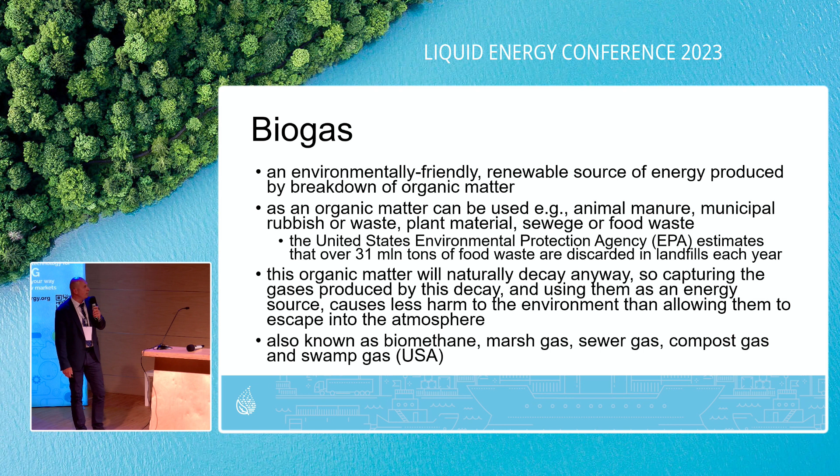The biogas can be used also in the circular economy, for example in the landfills, in the agriculture. All organic matter produced on the farm can be used as biomass. The biomass decays, and we can produce methane, which can be used to power machinery or to heat buildings. But yesterday we also heard that this is not the most efficient way of using it. The best is to make it pure, because as we see on the next slides, the composition of biogas, the raw gas, is quite low in methane, so we can remove all impurities and then make almost pure methane.

Simply put, to produce biogas we have to have the source of organic matter. We deliver it to a closed compartment, without oxygen, with some kind of microorganisms to speed up the process, and we can decompose this biomass. All the gases gathered above the surface then go to the tank, and we can use it as fuel. The rest of the biomass can be used in other ways, like for example fertilizer, as we heard about yesterday.

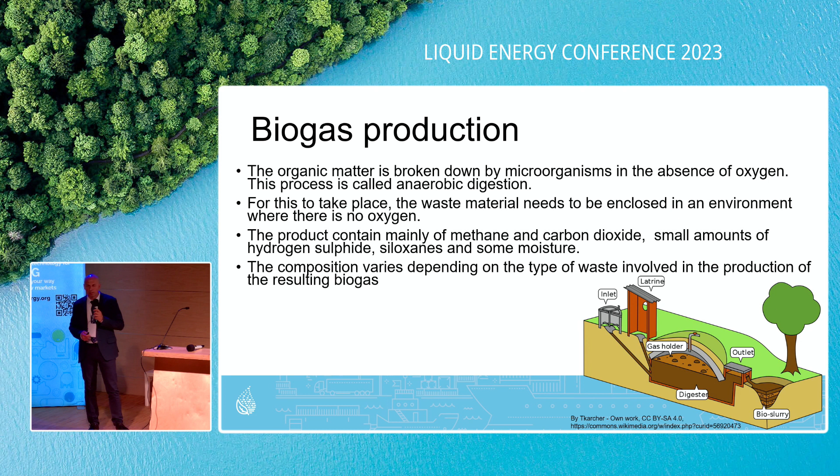Biogas and biomass are both biofuels and both renewable sources of energy, but for biogas, biomass is the raw material, and biogas is the end product. There are a few European Union directives which describe biogas as a renewable source of energy, so both biomass and biogas are environmentally friendly sources of energy.

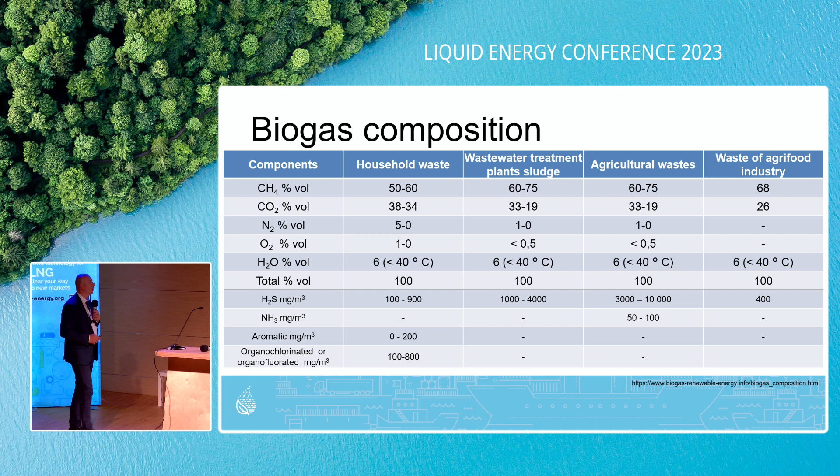We heard also that there are different kinds of waste which can be used for producing biogas. We can see that about 60% of the production, the gases when we decompose this biomass, is methane. Then about 30% is CO2, then nitrogen, some amount of oxygen, and also quite a lot of H2O, so water, and some other residuals in very small amounts. That's why using it locally as biogas to power machinery and heat houses is not so economic, because the heat power is quite lean, since it's only 60% methane in this biogas.

So what is the difference between biogas and natural gas? Because actually they are the same element, I mean the methane, the same compound. The difference is the time: the production method. Natural gas is produced over time, with pressure and temperature also decomposing organic matter to make methane and heavier hydrocarbons. Biogas, as we said, is the gas gathered and captured above the biomass which is decomposed. The second difference is the quantity.

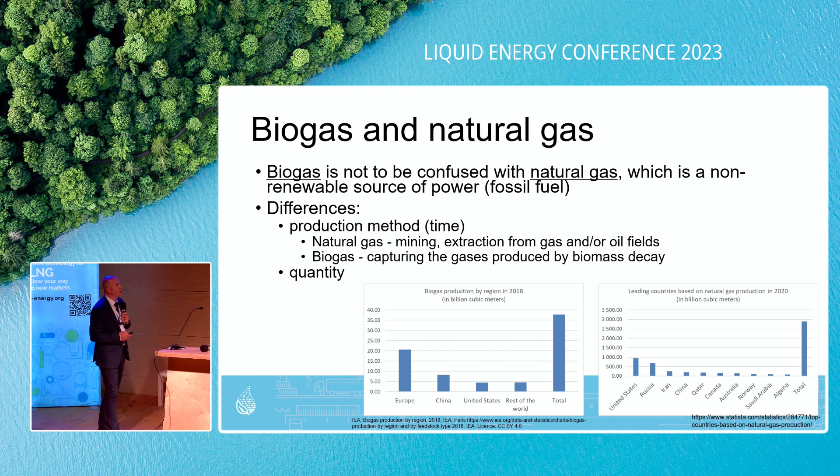Because it's a quite small amount of the biogas, we can blend it with natural gas to make it more friendly. For example, some EU directive describes the target that by 2020, 10% of energy in transport and 20% of energy for producing energy should be used with this renewable source of energy.

This is another advantage for biogas, because with natural gas, actually with liquid natural gas, we have a phenomenon called aging. Aging happens because the first compound which vaporizes is methane, and the composition changes as the heavier hydrocarbons are left behind, so the parameters of the gas in the tank change. In case of biogas, we don't have the heavier hydrocarbons, so when we remove all of these impurities, we have almost pure methane.

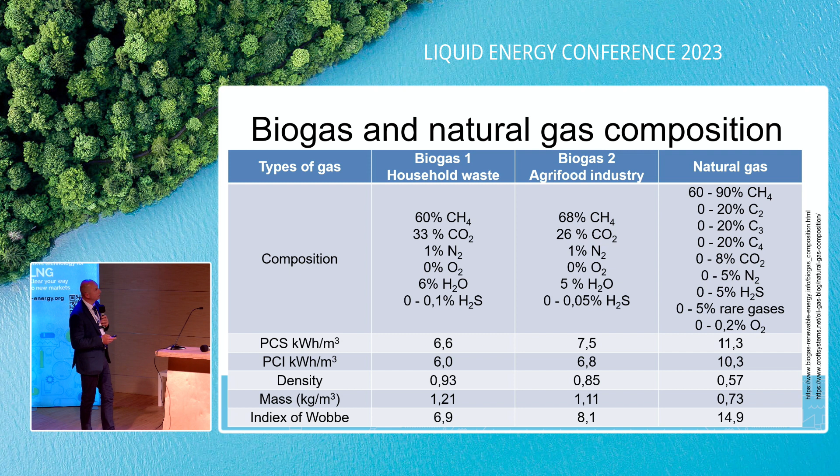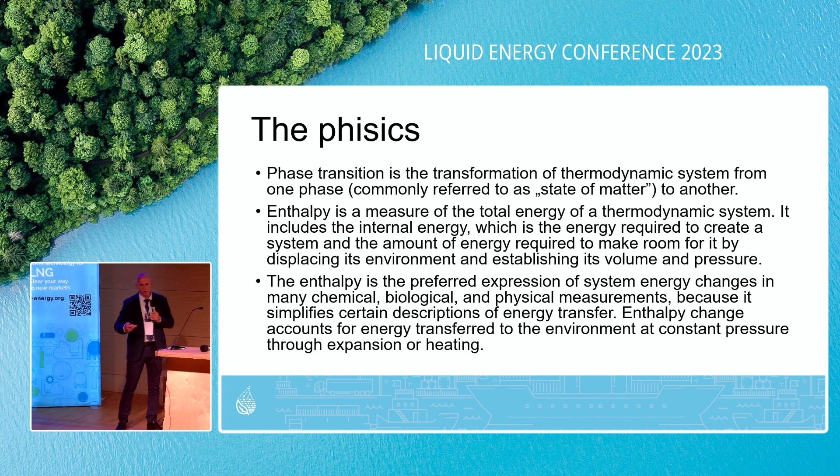A little bit of physics: all compounds and elements have three states of matter. We call them gas, liquid, and solid, because at room temperature and atmospheric pressure, they have such a state of matter. But it depends on the internal heat. When we deliver heat, we can pass from one state of matter to another. When we remove heat, we can also pass between them. So here is the phase transitions.

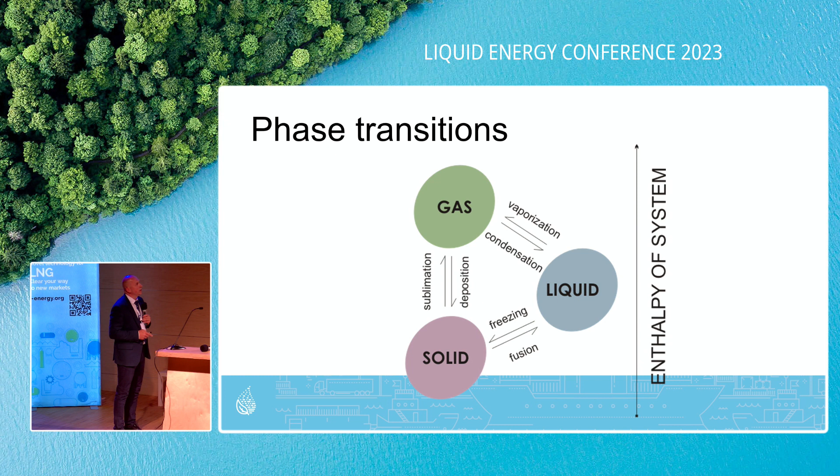When we have a solid and we increase the internal heat, the particles start jiggling more, and then we have liquid. This process is called fusion. When we deliver more heat, more energy, then from liquid through vaporization we can obtain a gas. In some temperature and pressure conditions, we can go directly from solid to gas, and this is called sublimation, which can happen at the triple point, discussed on the next slide.

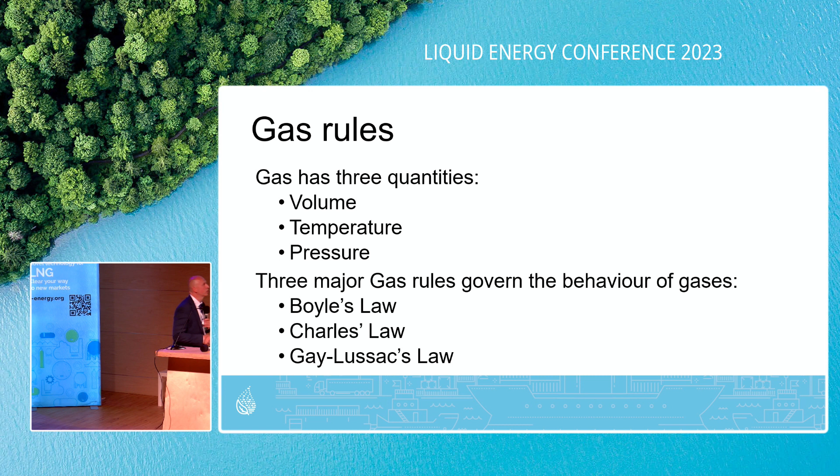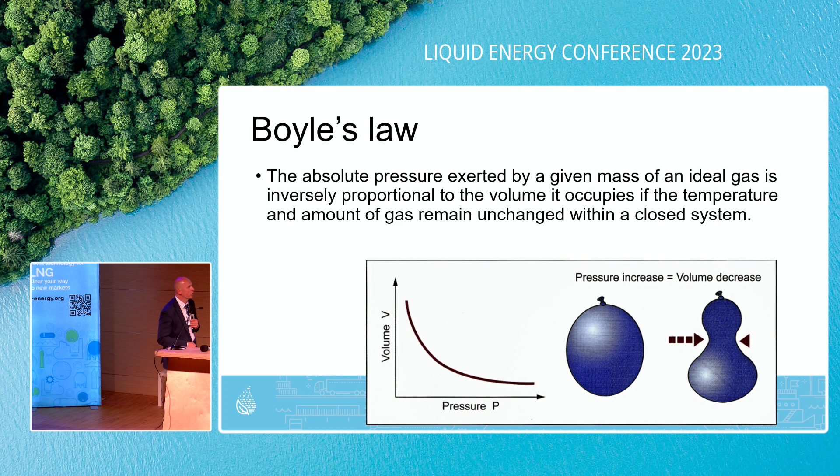There are three properties which describe the gas: volume, temperature, and pressure. There are three rules which govern this process. We have Boyle's law, which describes the relation between volume and pressure. Then we have Charles's law, which describes the relation between temperature and volume, and also Gay-Lussac's law, which describes the relation between temperature and pressure, but in a closed space.

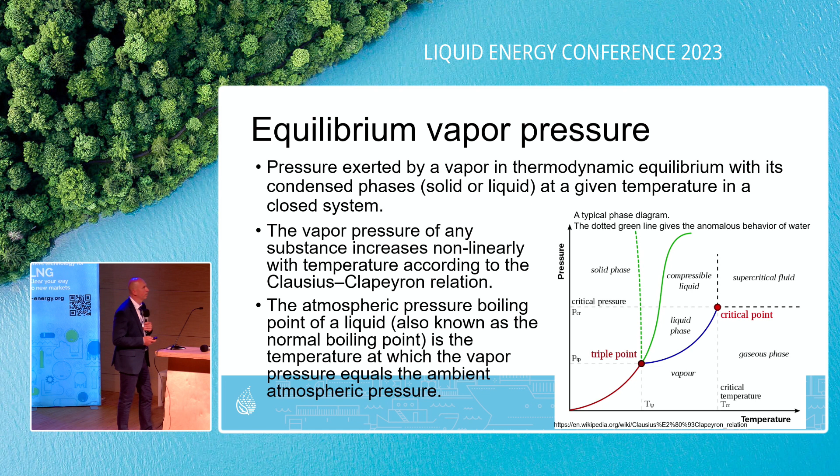As we said, all substances or compounds have three states of matter. Here we have the typical phase transition diagram. This blue line shows us the boiling temperature at different pressures. This boiling line is limited by two points, the triple points, where we actually have 3 states of matter: solid, liquid, and gas. Then on the other end, we have a critical point. The critical point is the highest temperature at which such a substance has liquid state. Behind this point, even if we increase pressure, it will always be a gas. The density will be the same as the liquid, but the pressure would be much higher.

Here is the same diagram for methane, and we can see that the triple point is at a temperature of about minus 182. Then we have the critical temperature about minus 82 degrees, which means that if we have liquid methane in a tank, in a closed space, we cannot allow it to warm up more than minus 82 degrees, because from a pressure of about 45 bars, after this point we have 600 bars. So it's a quite dangerous situation.

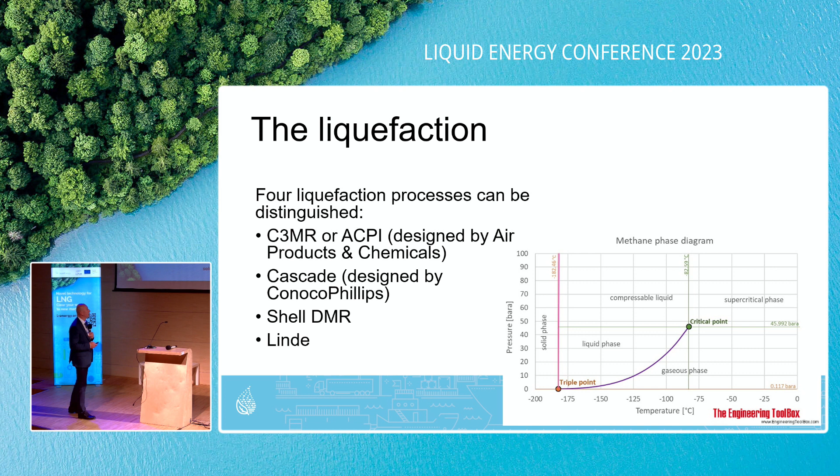The critical temperature for other fuels are shown on this slide. For example, ethylene has a temperature a little bit more than 0 degrees. Here we have the pressure. So methane, as we said, minus 82.

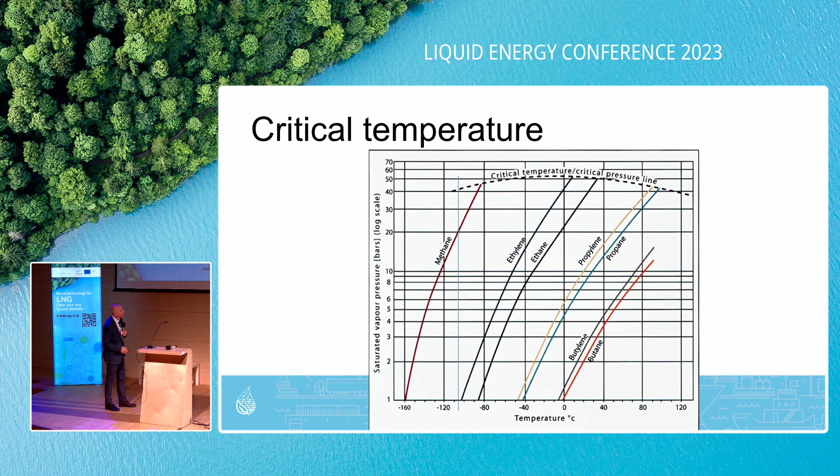For liquefaction, on the previous slides a few methods were shown for liquefying this biogas. There are some examples, for instance here for unconventional gas solutions, which offer a few types of facility, just an example found by short browsing. So we have from 300 cubic meters per hour up to 3,000 cubic meters per hour. Here is the Wärtsilä example, also scalable from 6 up to 50 tons per day. So there are solutions which can be used to produce liquid biogas locally.

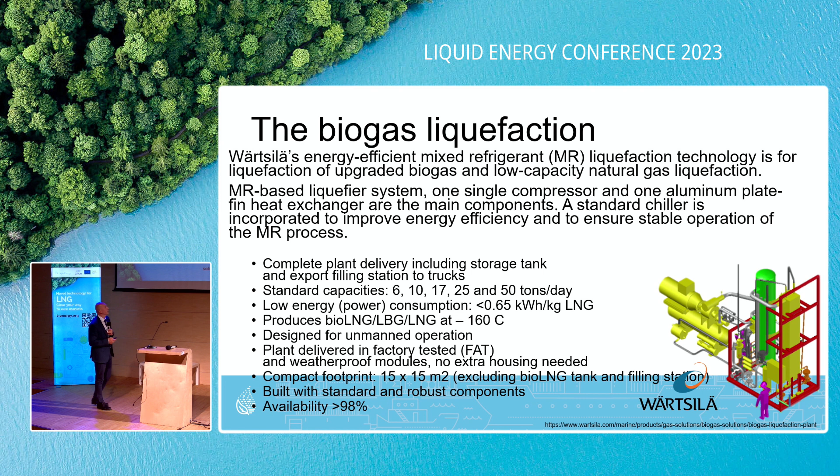Now, the biogas has different names. I mean liquefied biogas, so it's called bio-LNG, liquid biomethane, or liquid biogas. More often bio-LNG is used as the product name.

When we use pure biomethane, biogas, then we can even have negative numbers, but on condition that the 30% of CO2 which is in the raw biogas is also captured and used for other purposes. Other purposes can be, for example, producing synthetic methane using this CO2 and hydrogen.

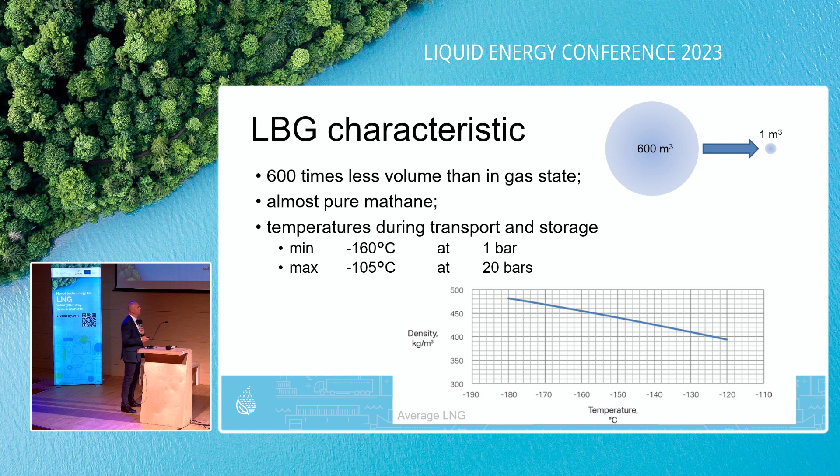Another point is that when we warm up the LBG, the density of the LBG will decrease. So here we have almost solid, minus 180 degrees, and the density is about 480 kilograms per cubic meter. In case of about minus 120 degrees Celsius, we have less than 400 kilograms per cubic meter. This is quite important because it could cause another phenomenon like rollover. The batch difference could also make such a dangerous phenomenon or situation.

LBG is extremely flammable. It means that even at this temperature, there is an amount of vapor which can be ignited. But that also doesn't mean we have enough vapor to sustain this fire. It could flame for 5 seconds, but then disappear because there is not enough methane in the gas state to sustain the fire.

In order to burn, it must be vaporized, mixed with air, with enough amount of oxygen. So there is a very narrow proportion with air, and then it's ignited. The vapor itself is not explosive, but there is also a phenomenon called BLEVE. When we have a closed space and reach a temperature more than minus 82 degrees, then we have an immediate increase in pressure from about 50 bars up to 600 bars.

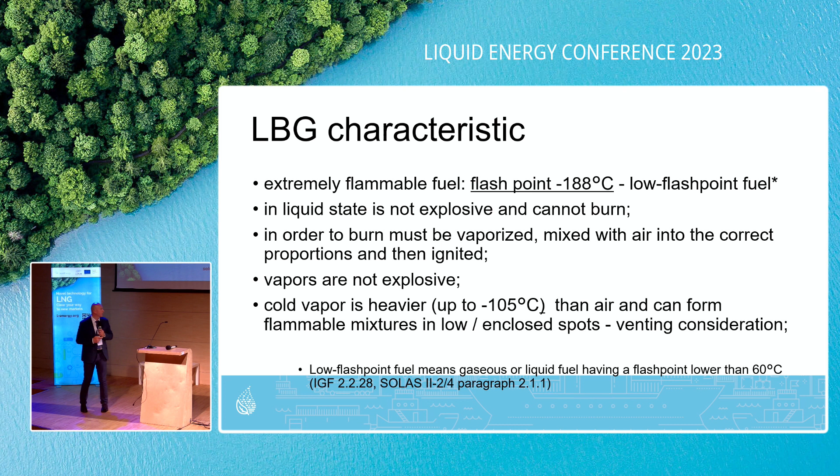The flammability limit is quite narrow, from 5% up to 15% in air. Below that we have too lean a mixture, so it will not burn because there's too small an amount of fuel, of the methane. Above 15% we have too rich a mixture, so too small an amount of oxygen to keep a fire.

Auto-ignition temperature: if we warm up the gas up to 537 degrees Celsius, it could ignite itself. But this high temperature also means it cannot be used, for example, for engines, diesel engines instead of diesel, because the temperature is too high. The other fuels, like diesel oil, the range is from 260 up to 371 Celsius, and gasoline also has a lower range than methane.

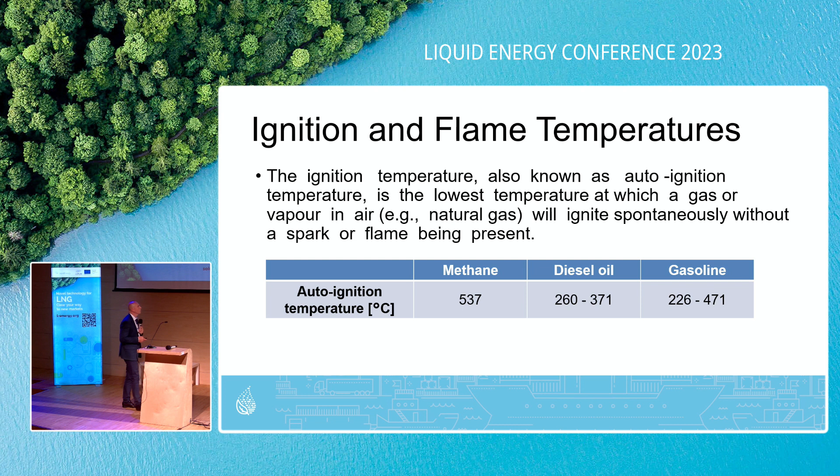Energy units: traditionally we describe the energy which is in the fuel with joule or BTU, British Thermal Unit, which is defined as below. We have other BTU units like MBTU, which is 1000 BTU, and MMBTU meaning million BTU.

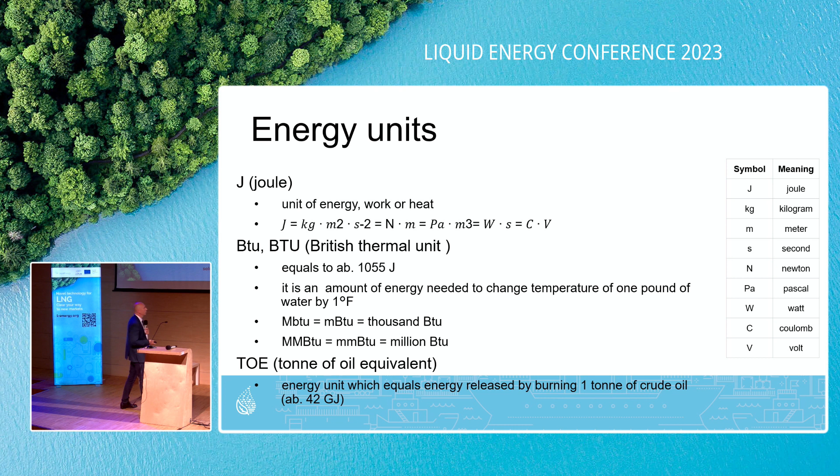Also another equivalent is ton of oil equivalent. So for diesel it's about 42 gigajoules, this being 1 ton of oil equivalent.

So energy density is as follows: diesel is about almost 40 gigajoules per cubic meter. In case of bio-LNG, also LNG, it's a little bit more than half of it. And the density of other forms of natural gas, biomethane, which could be compressed, is 9 gigajoules per cubic meter. In case of natural gas at atmospheric pressure, 1 cubic meter has only about 0.3 gigajoules per cubic meter.

The next point of this presentation concerns the hazards of this fuel, and when compared with other fuels, of course we have energy. The fuel is flammable, so it can cause a fire.

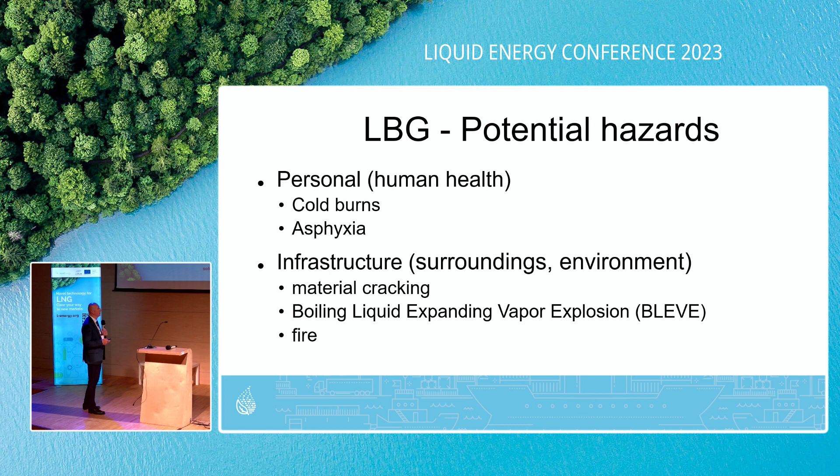In this case, we also have extremely low temperature. So all these hazards we can divide into two main groups: for personal injuries, cold burns and asphyxia; and for infrastructure, material cracking — when we have contact with a big enough amount of this cryogenic liquid, we can make steel very fragile, and other materials too.

The other hazard is BLEVE, boiling liquid expanding vapor explosion. It's not an explosion because the mixture ignited and we have a flame, but because the temperature increases in a closed space and we get pressure, so the compartment breaks and we have an explosion.

So the health hazards are burns, because it's a fire; frostbite, because of the cold; and asphyxiation, because of low amount of oxygen. As we said, when the vapor is cold, below minus 105 degrees Celsius, it's heavier than air and pushes out the air from the place where we normally live, so there is no oxygen to breathe.

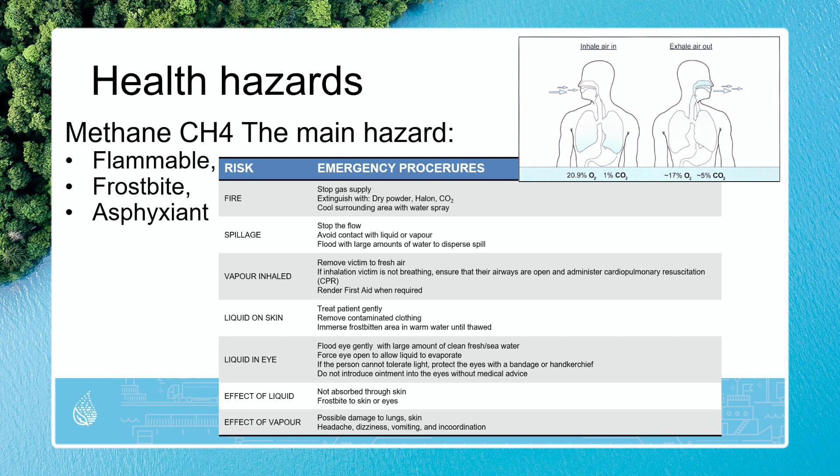Other risks are described on the left side of this table, along with what should be done in such a situation, which is also described in the data sheet mentioned before. I think Marcin will explain a little bit more about this.

Environmental hazard: bio-LNG rapid evaporation is expected from both land and water with no residues left behind. So when we spill LNG or LBG on water or on land, it vaporizes very quickly, and there is no residue left on these surfaces.

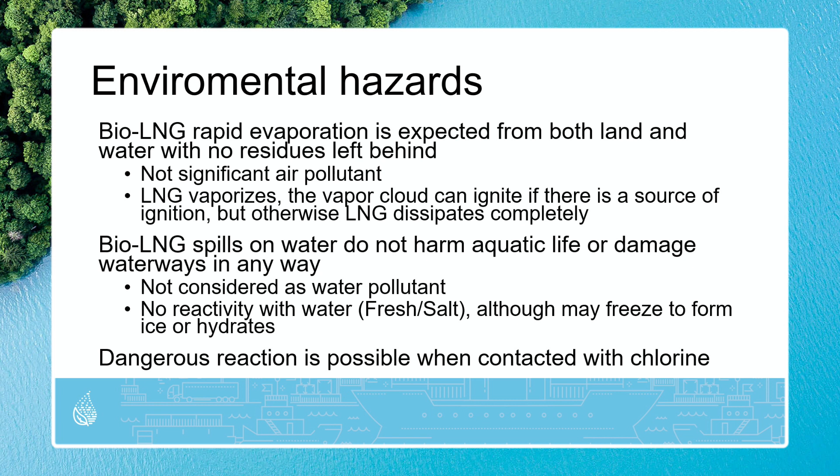We cannot say it's purely environmentally friendly, because methane is about 20 times a stronger greenhouse gas, so of course it has an impact on the warming climate effect. But we can say it's not a significant air pollutant — we don't have emissions like burning diesel or other fossil fuels. So you could say that LNG and LBG are quite environmentally friendly because they're the cleanest, but it's not entirely true — it's still a fossil fuel, but it's the cleanest fuel from this group.

When we spill on the water, it's vaporized also immediately. Do not harm any creatures below the water surface, and do not react with water. Do not make any substances. Sometimes it's dangerous when in contact with chlorine.

Reactivity with other substances, so with water. Of course, when we have at the same place, for example in the pipe, some amount of water and liquid methane, the water will freeze as ice and could block some pipes, valves, and so on. Sometimes it can create hydrates. It's a substance which looks similar to ice, but it's heavier than water, so it can be below the surface.

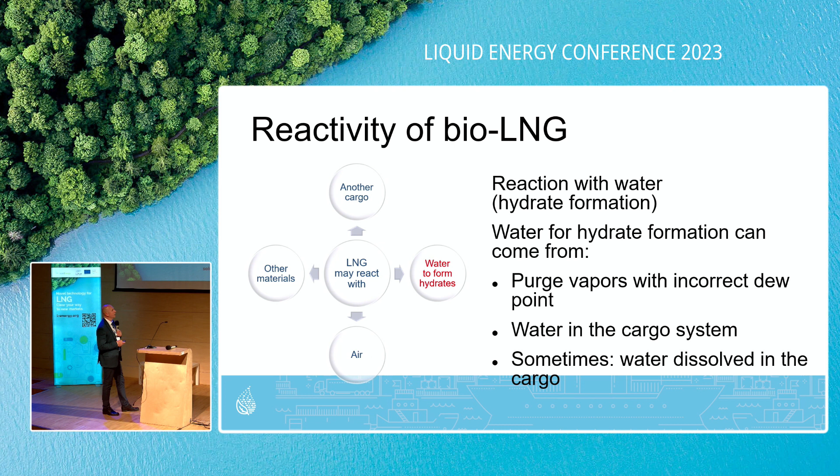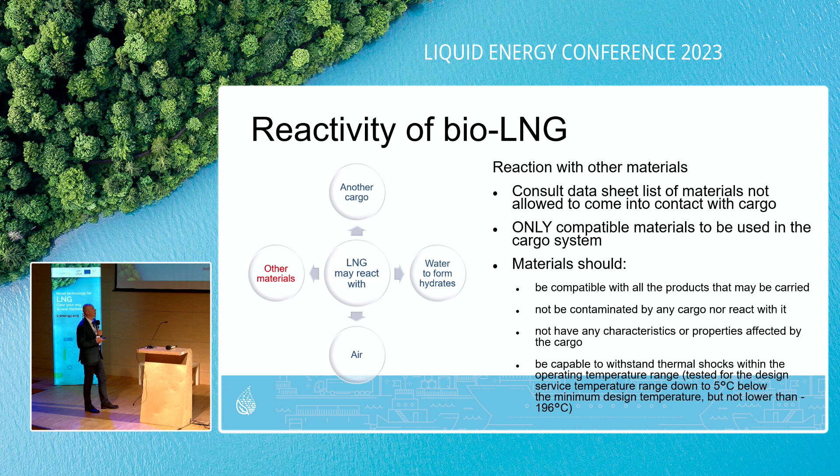With air, of course, it creates a flammable mixture if there is enough amount of fuel and oxygen. So every time we make operations with tanks, we have to separate the methane with inert gas, for example nitrogen. With other materials and other cargo, we always have to consider and consult the data safety sheets for these two materials, these two cargos, because we have to know if they react with each other or not. The same for gas carriers, we always have to consider the descriptions of the other materials, other cargo, and what we should do.

And ignition, explosion, flammability hazard. Auto-ignition requires quite high temperature, but when the flammable mixture touches a surface that is hot, for example a metal surface with temperature higher than 500 degrees Celsius, it could cause fire. The flash point of a liquid is the lowest temperature at which the liquid will evolve sufficient vapor to form a flammable mixture with air. So flash point is the temperature at which we can make a fire, but not sustain it, for example just for a few seconds.

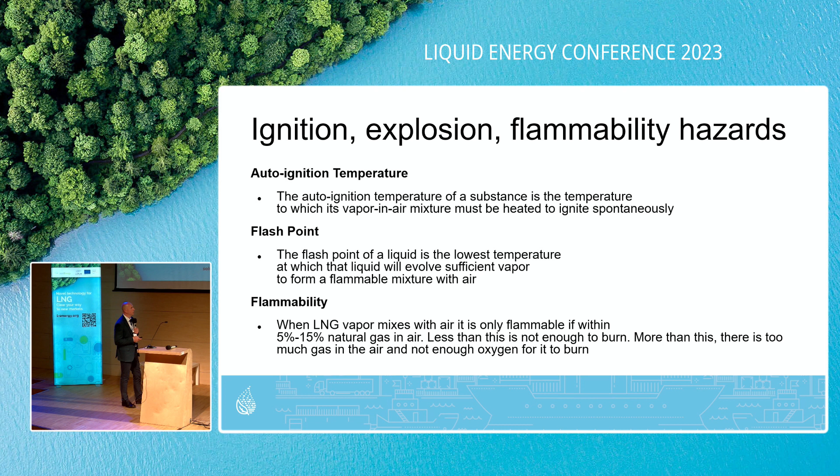Flammability is the range of fuel and oxygen, or air, which creates a flammable mixture. So when LNG, LBG, or bio-LNG is exposed to air, it evaporates extremely rapidly, and in a very short time we have an explosive flammable mixture. When we ignite this mixture, if we have a pool of LNG or bio-LNG, we will have quite a long period during which the fire continues. Depending on the amount of bio-LNG or LNG, the flame could reach 150 meters high. We can see this flame, so it's visible. So about the flammability ranges, we were talking already.

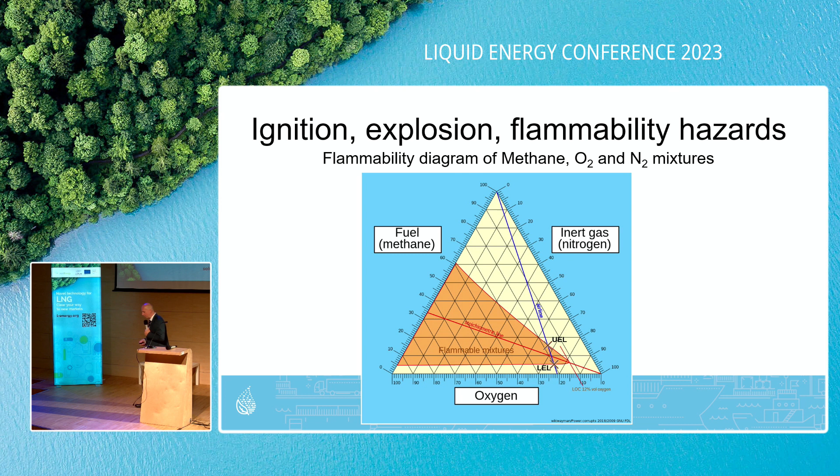Here is the diagram of interaction between the fuel, methane, oxygen, and inert gas, or nitrogen if we're talking about air. This is the area in which we have a flammable mixture at different proportions of these three compounds. This red line is the composition in which all fuel and all oxygen is used in producing flame, more or less 1 to 2, so 33% methane, 2 particles of oxygen. Here we have the line which describes the proportion with air, and here we have also the lower explosive or flammable limit and the upper flammable limit. This line also shows us the minimum amount of oxygen which can produce a flammable mixture with air.

As we said, we have the mixture of vapor and oxygen or air, and if there is no ignition, there would be no fire, and we can expect that all this methane dissipates and floats into a higher layer of the atmosphere. But during vaporizing, while the mixture is flammable, if it meets an ignition source, we can have a fire.

So, naked light, smoking, spontaneous ignition, waste somehow getting hot and hotter, hot work, cold work, any spark when we hit something. Safety tools, aluminum sometimes can also, like leather, aluminum and leather can cause a spark. Portable electrical equipment, and so on. All this can ignite the flammable mixture.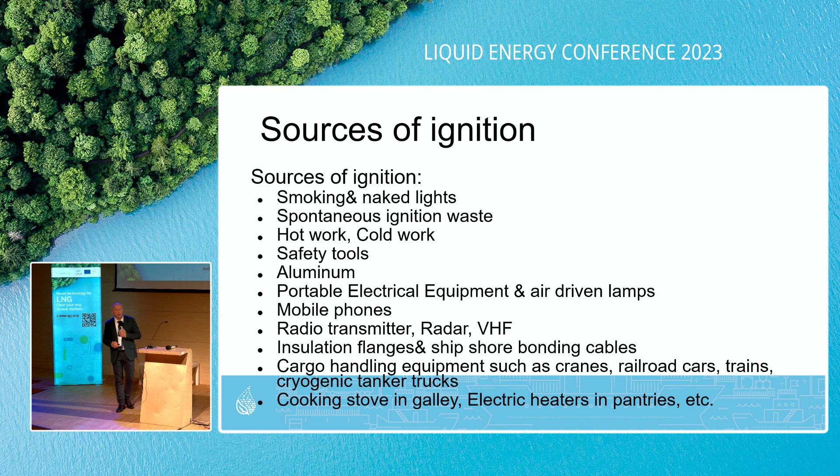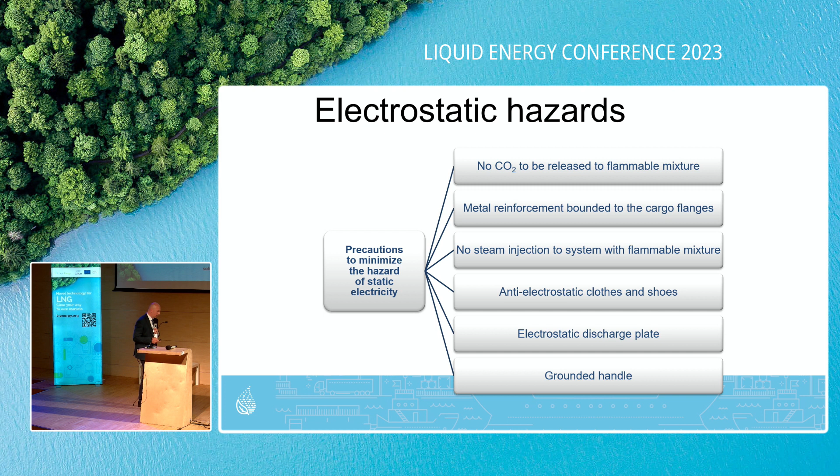Also electrostatic discharge can cause fire, and we have to avoid situations which can cause such electrostatic discharges. For example, we cannot use CO2 directly on a pool or vapor of methane, because when we have the pool of liquid methane, the vapor just above the surface has a temperature of about minus 105 degrees Celsius or less, and CO2 has a frozen temperature of about minus 70 degrees, which means that when we put CO2 in a gaseous state directly into this vapor, it could make ice, and CO2 ice, due to friction, can also cause ignition. Also steam, metal reinforcements, and so on - we have to follow these rules to avoid electrostatic discharges.

Toxicity hazards - there is none, the methane is not poisonous.

When we have a pool spill with LNG or LBG, we will have some amount of liquid methane, and we get a cloud depending on wind direction. At the beginning, very close to the spill, we have an overrich mixture. Then we have the flammable range, from 5 to 15% methane. Then we have a too-lean mixture to be fired.

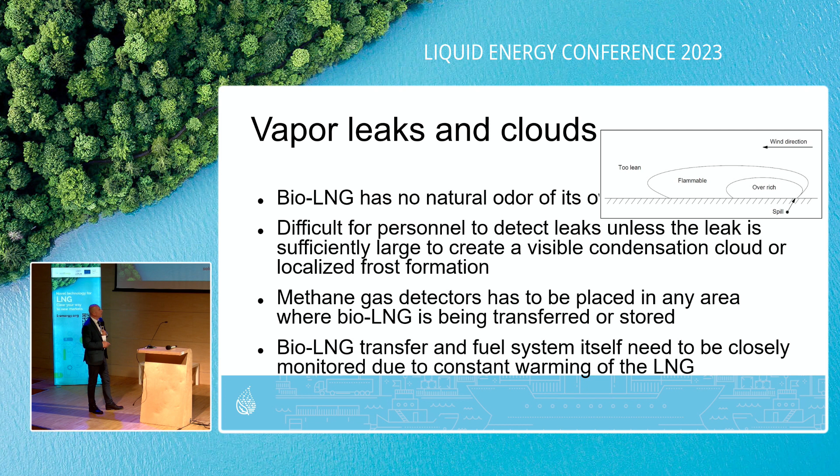If there is no immediate ignition of the bio-LNG, a vapor cloud may form. There is first of all the lack of oxygen, so there is no breathable atmosphere. When a spill occurs in an open space, the liquid will rapidly evaporate to produce a vapor cloud, which will gradually disperse downwind. The vapor cloud or plume is flammable only over part of its area, as was said before.

The vapor cloud is long, thin, cigar-shaped. That depends on the speed of the wind and also the ambient temperature - the speed of warming up this methane. The cold vapor is denser than air at temperatures below minus 105 degrees, so initially it will keep to the ground.

The major danger from this vapor cloud occurs when it's ignited. Then we simply have the fire, and the fire of course produces more vapor, which can sustain the fire, and the fire will become greater. How to behave with such a fire will be told by Marcin later on.

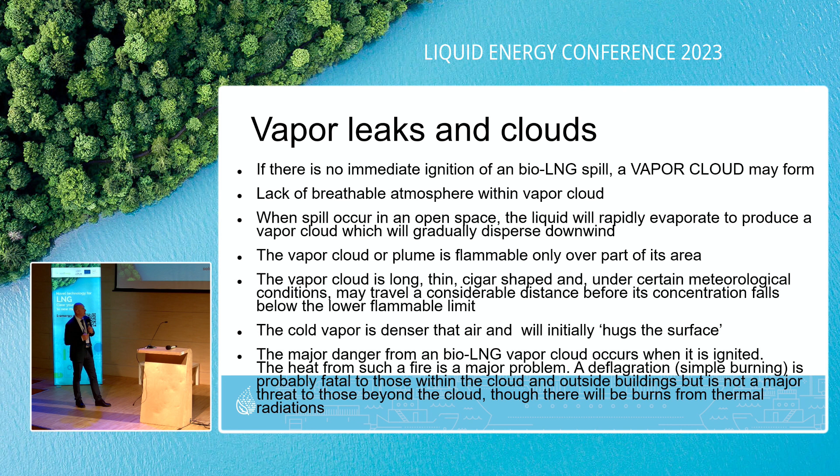Extremely low temperature, so these are cryogenic liquids. All substances which are not methane at this temperature can form ice, for example moisture - simply said water - and there is quite a danger because we can break down the facility, the infrastructure. When we pour directly onto steel, there will be a thermal shock: we drop the temperature of such infrastructure from, let's say, 20 degrees Celsius rapidly to minus 160 degrees. There is no material which can be proof against such an experiment, so the steel will become brittle, fragile, and broken.

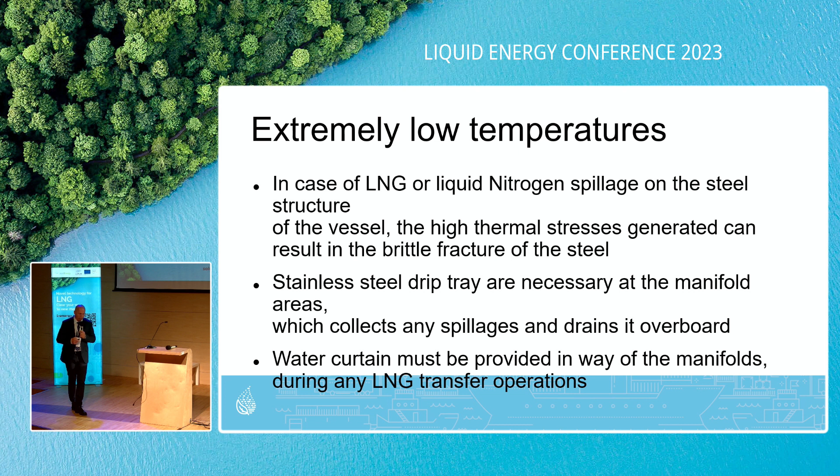So everywhere we expect some drops of liquid methane, we should protect it - for example, putting some tray below these valves, mostly with water, because when the drop of liquid methane touches the water, it vaporizes but also condensates the water in the air, and we will see a cloud. The cloud is not, of course, because of methane, but because of condensed moisture which is in the air.

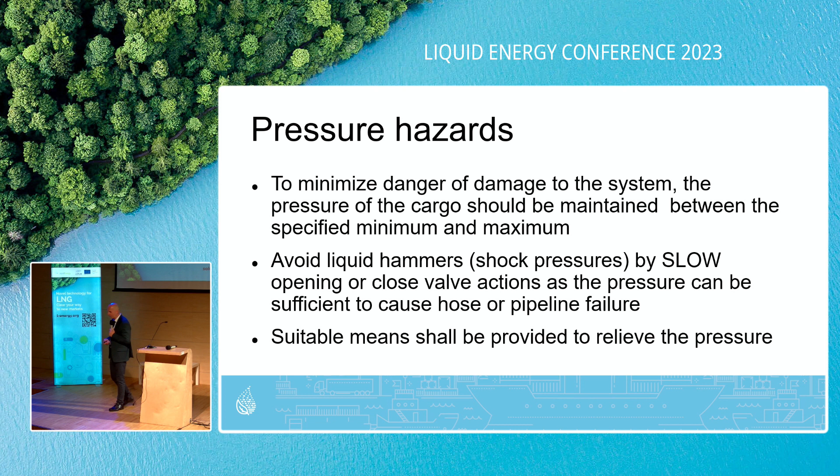Pressure hazards: to minimize danger of damage to the system, we should keep the tanks and pipes within the range of safety described by the producer. We should avoid opening valves very fast because we could cause hammer shock pressure. And we should provide an instrument or facility which releases the vapor from the tank if the pressure is too high.

When we, for example, want to blend to make more friendly natural gas, we can achieve a quite dangerous situation when we have this batch difference - when we have one cargo, for example liquid methane, with a specific composition and specific temperature, and then we add...

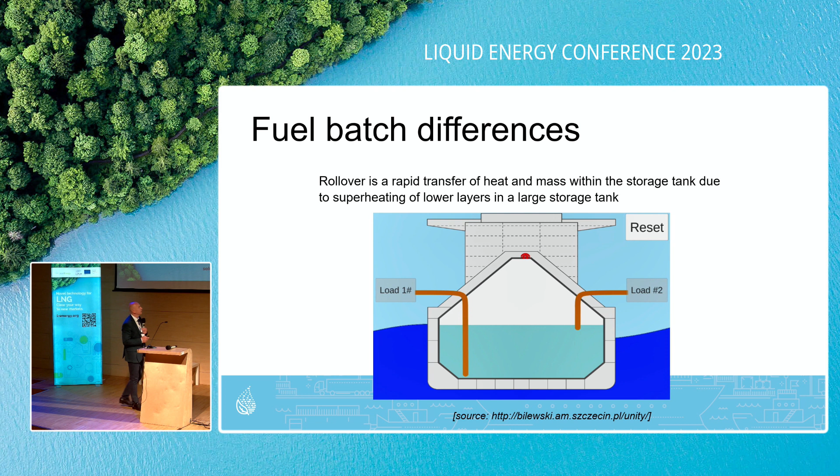When we load other cargo, for example methane, we can have a situation where the lower layer is heavier and colder than the upper layer. After a while, because of the pressure of the higher layer, it becomes more saturated and warmer and warmer, until there's a moment when the lower layer becomes warmer and lighter than the upper layer. Then they roll over and release a large amount of vapor. This is the rollover phenomenon.

We should avoid such situations. To prevent this, we should mix, or put the other cargo in from the nozzle to improve mixing of these two kinds of cargo.

Another thing is BOG management, boil off gas. We have to manage this during transport through the sea. For the gas carrier, this is quite a big problem because the daily rate of vaporization is 0.10 to 0.15% of the total amount. So when we have, for example, 100,000 cubic meters of such cargo, we will have quite a lot of vapor, correct?

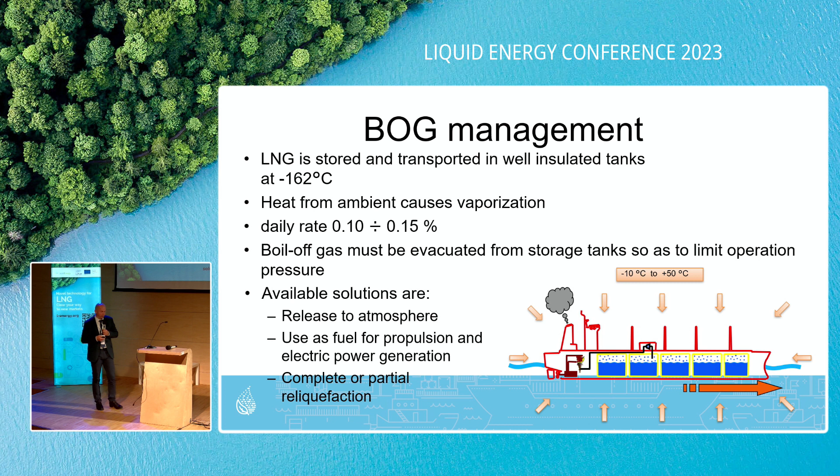Or reliquefaction. If there is a facility, we can reliquefy this vapor, but it's also a cost - the cost of fuel and also the cost of greenhouse emissions, because to reliquefy it we have to use traditional fuel, which increases greenhouse gas emissions. But what is done depends on the agreement between the shipper and owner of the cargo. In the case of cisterns, we don't have the opportunity to reliquefy.

So there is a semi-pressure compartment which keeps this methane at a pressure between 0 or 1 bar to 20 bars during the warming up, because during transportation this gas will become warmer and warmer as heat from outside penetrates the tank. In this case we just have the release valves, safety release valves, which keep the pressure in this tank within safety ranges.

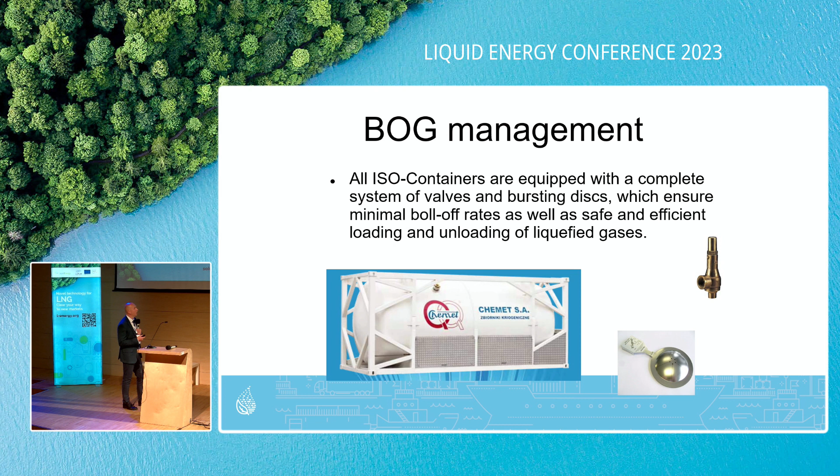So the conclusions: LBG is odorless, colorless, non-corrosive, flammable, and non-toxic. As was said today, it's also a beautiful fuel. It must be understood that the properties which make LBG a good source of energy also make it hazardous, because it's a fuel.

Compared to traditional fuel, it's also very cold, at an extremely low temperature. All available storage and transportation temperatures are considered cryogenic - always less than minus 120 degrees.

LBG is a renewable source of energy, and we cannot treat LNG the same as LBG, but LBG can be transported, stored, and transferred with the same infrastructure used for LNG. So it's very easy to substitute liquefied natural gas with liquefied biogas.

It's not flammable - LBG itself cannot be fired, but the vapor can make a flammable mixture. So we should ventilate well the compartment where gas, the low temperature vapors, could appear. Against large leaks and spills, we have safeguard systems which can prevent and give warnings.

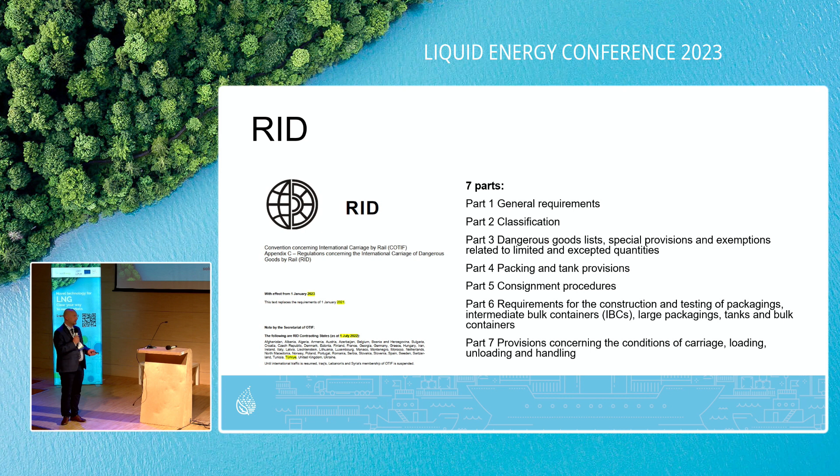And if we compare the ADR with the RID and with the ADN, we'll see that the content is almost the same. The only difference is that the RID has 2 fewer parts - the last two parts are not included in the RID. Because the documents are very similar, I'll try to present the general rules together, without splitting by each way of transportation. I will tell about it all together.

So all three documents start with the general safety measures, and here we can find general rules, not only for LBG or LNG, but generally for the transportation of dangerous goods. All participants or parties of the carriage of dangerous goods shall take appropriate measures according to the nature and extent of foreseeable dangers, so as to avoid damage or injury and, if necessary, to minimize their effects. They shall, in all events, comply with the requirements.

And when the risk occurs, the emergency services should be notified, and all information should be given to these services.

Then we can find the requirements for each party of the transportation. Generally we have three main participants: the consignor, the carrier, and the consignee.

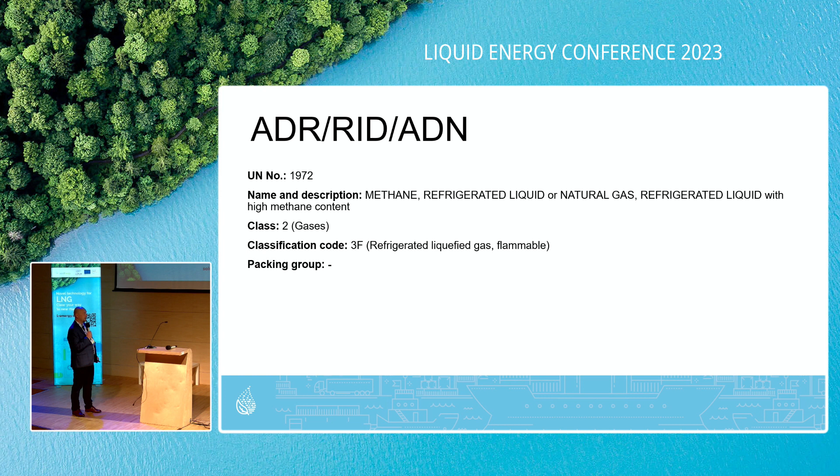Then we have the class, and the class code is number 2, which means that it is a gas. Then we have the classification code, which is 3F, meaning it is a refrigerated liquefied gas and it is flammable. Then we have the packing group, and there is no packing group assigned.

Then we have the information about the labels which are required, and for the LBG, as for the LNG, the label code is 2.1, which means this type of label: it is square, a little bit rotated, with a minimum dimension of 10 centimeters, and it should be red. We can find the class, and as I presented on the previous slide, the class is number 2, and we have the class symbol, which is the flame for the LBG. There can be additional text in the middle, but in case of the LBG there is no additional text.

For the rail, for the trains, there is one more label which is required. It is number 13, and it looks like this: a triangle, upside down let's say, with the exclamation mark, the black one, and the minimum dimensions are also defined.

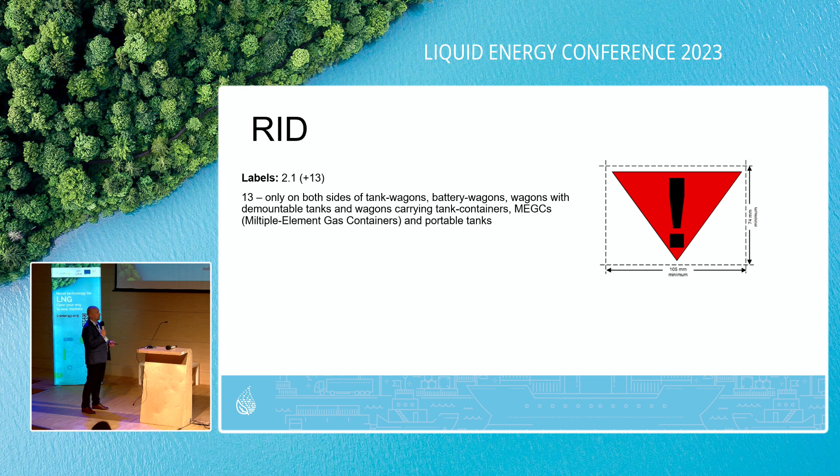Additionally, on the carrying vehicle, the LBG should be marked with the orange-colored plate marking, which gives us the hazard identification number. In case of the LBG, it will be 223, and the UN number, as I said, is 1972. We also have the minimum dimension defined, and the shape and size of the numbers.

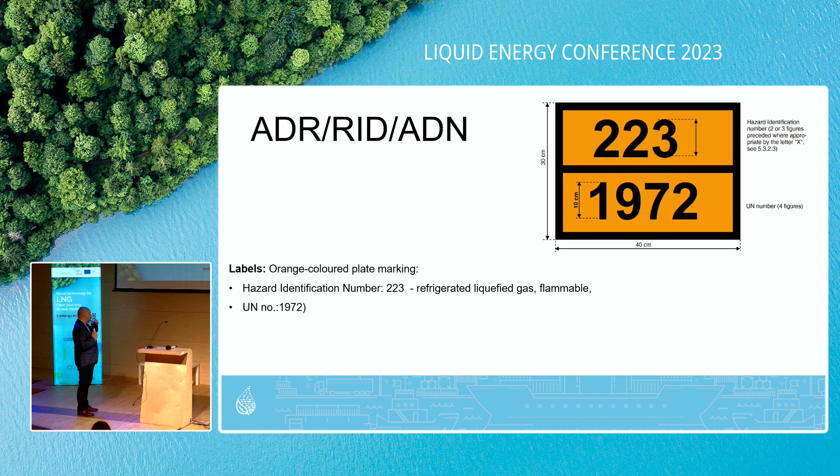Then we have the code for the special provisions. In this case it is 392. It's a special provision when we carry the LBG or LNG not as cargo, but as a fuel for the vehicle which is fueled by this type of fuel, so it is not very common.

Then we have the limited and excepted quantities. In case of the LBG, the codes are 0 and E0, which means that it is not permitted to be carried as a limited quantity, and it is not permitted to be carried as an excepted quantity.

Then for the ADN, for the inland waterways, we have additional requirements. There is carriage permitted, and the code is T, which means carriage is permitted in packages and in tank vessels. For this carriage, there is defined equipment which is required, and we have 3 codes.

The code is PP, which means the protective equipment: for each member of the crew, a pair of protective goggles, a pair of protective gloves, a protective suit, and a suitable pair of protective shoes should be secured. On board tank vessels, protective boots are required in all cases.

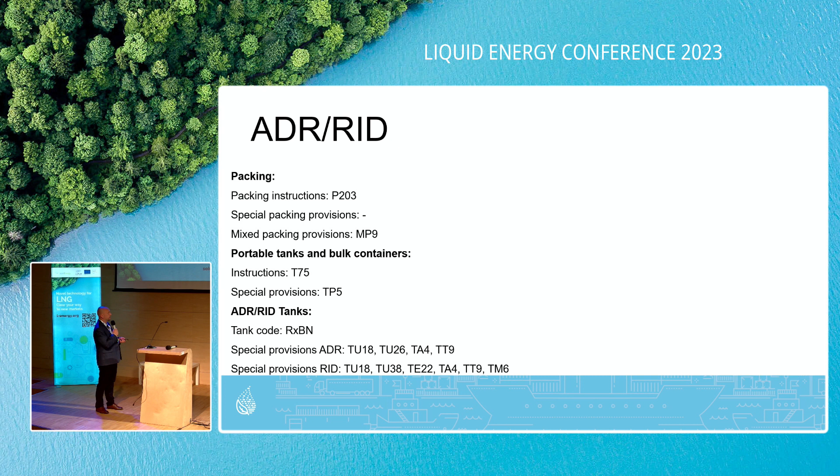Then for the rail and for the road, there is information on what type of vehicle can be used, and the code is FL, which is from flammable. So the car should be prepared, should be suitable for the carriage of this type of cargo. Then we have the transport category, and the code is 2.

Also information about the types of tunnels through which the LBG can be transported, because it is not possible for each type of tunnel. To be honest, only through tunnels of category A can the LBG be transported.

Then we have the special provisions for carriage, and then we have the codes for loading, unloading and handling. We have the code CW9, which means that packages shall not be thrown or subject to impact, and there is an additional requirement for roads. Then we have the code CW11, which means that receptacles should always be placed in the position for which they were designed, and be protected against any possibility of being damaged by other packages.

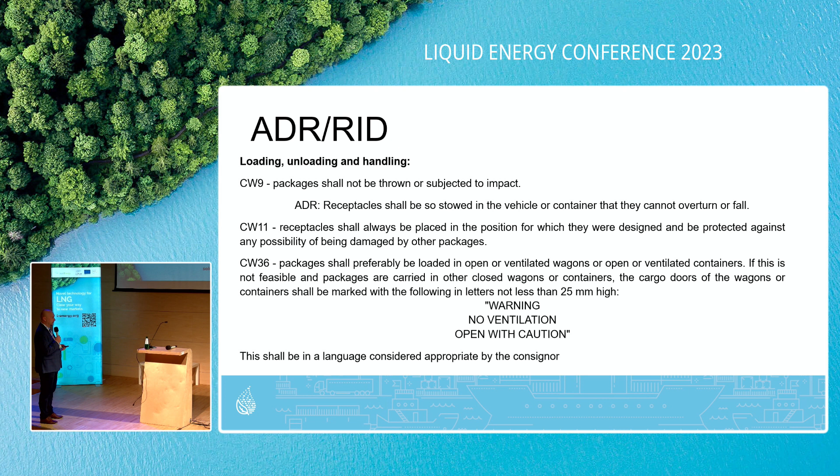And then we have code CW36, which means that packages shall preferably be loaded in open or ventilated wagons, and if it is not possible, the marking information should be given on the door, warning: no ventilation, open with caution.

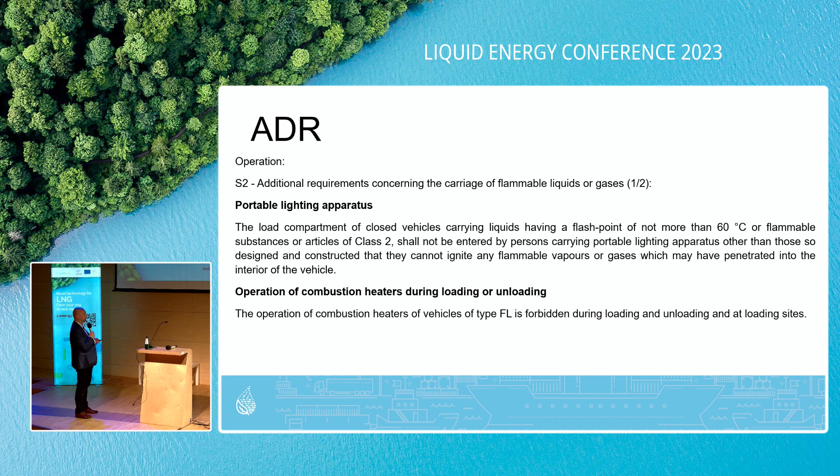Then for the road we have an additional requirement, code S2, which means additional requirements concerning the carriage of flammable liquids or gases, and there is a list of those requirements, but I won't go very deep into this.

Then we have carriage by sea, but as I said, it is not very probable to transport the LNG cargo by big ships. But there is a code, called the IGC Code, the International Code of the Construction and Equipment of Ships Carrying Liquefied Gases in Bulk. So we can find the most crucial information about the construction and handling of this type of cargo.

And I will focus on chapter number 18, where we can find the operating requirements. The main goal for the IGC code is to ensure that all ship staff involved in cargo operations have sufficient information about the cargo properties and operating the cargo system so they can conduct cargo operations safely. Those involved in liquefied gas carrier operations shall be made aware of the special requirements and precautions necessary for their safe operation.

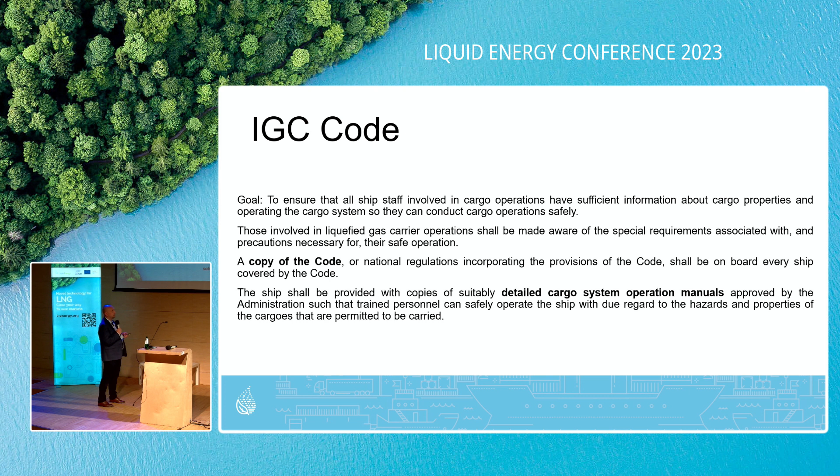A copy of the code, or the national regulations incorporating its provisions, shall be on board every ship covered by the code, and the ship shall be provided with copies of suitably detailed cargo system operation manuals. The cargo operation manuals should include information such as the overall operation of the ship from dry dock to dry dock, including procedures for cargo tank cool down and warm up, transfer including ship-to-ship transfer, cargo sampling, gas freeing, ballasting, tank cleaning, and changing cargoes.

Cargo temperature and pressure control systems, cargo system limitations including minimum temperatures, cargo system and inner hull maximum pressures, transfer rates, filling limits, and sloshing limitations, nitrogen and inert gas systems, firefighting procedures, operation and maintenance of firefighting systems, and use of extinguishing agents.

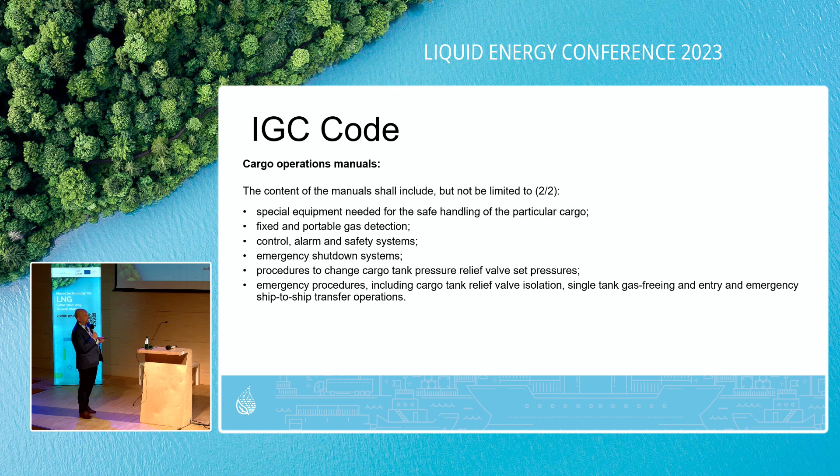Additionally, the special equipment needed for safe handling of the particular cargo, fixed and portable gas detection, control, alarm and safety systems, emergency shutdown systems, procedures to change cargo tank pressure relief valve set pressures, and emergency procedures including cargo tank relief valve isolation, single tank gas freeing, and entry, and emergency ship-to-ship transfer operations.

Information about cargo, in our case about the LNG, should be carried on board, and the content of this information should include a full description of the physical and chemical properties necessary for the safe carriage and containment of the cargo, reactivity with other cargoes capable of being carried on board, the actions to be taken in the event of cargo spill or leaks, countermeasures against accidental personal contact, firefighting procedures and firefighting media, special equipment needed for safe handling of the particular cargo, and emergency procedures.

The physical data supplied to the master shall include information regarding the relative cargo density at various temperatures, to enable calculation of the cargo tank filling limits. Contingency plans prepared for spillage of cargo carried at ambient temperature shall take into account potential local temperature reductions, such as when the escaped cargo has reduced to atmospheric pressure, and the potential effect of this cooling on hull steel.

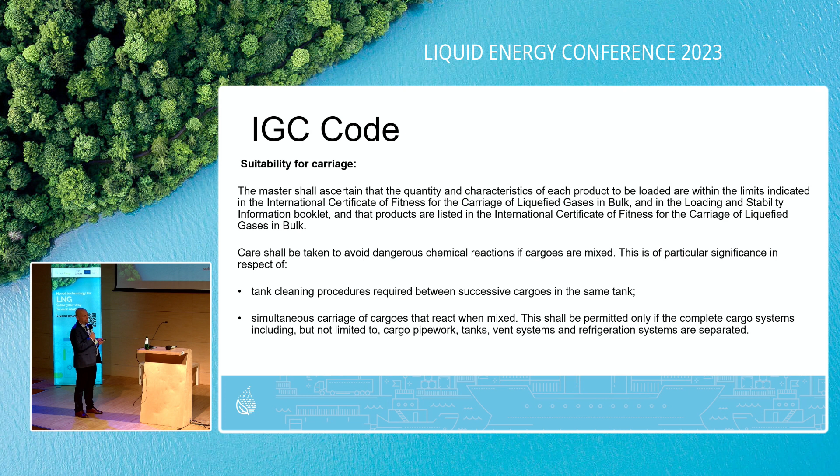There are some additional requirements for the cargo at low temperatures. When carrying cargoes at low temperatures, the cool down procedure laid down for that particular tank, piping, and ancillary equipment shall be followed closely.

Loading shall be carried out in such a manner as to ensure that the design temperature gradients are not exceeded in any cargo tank, piping, and other equipment.

If provided, the heating arrangements associated with the cargo containment system shall be operated in such a manner as to ensure that the temperature of the whole structure does not fall below that for which the material is designed.

So some general information about the cooling. Generally, the tanks of the LNG tankers are always cooled down.

So even if the cargo is unloaded, some portion of the cargo stays just to keep the temperature.

There is also information about the trainings for the crew members, and there are, let's say, 2 levels of the trainings. All personnel, so all crew members, shall be adequately trained in use of protective equipment provided on board and have basic training in the procedures appropriate to their duties necessary under emergency conditions.

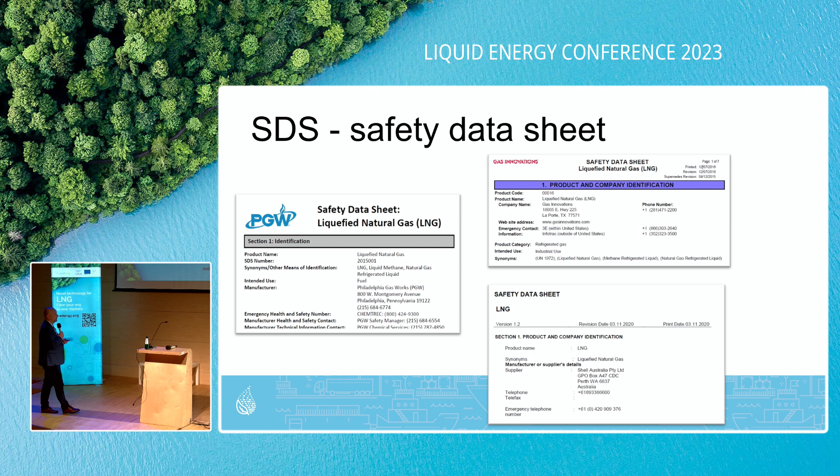So first, the identification of the hazards. I won't dive very deeply into this topic because most of these hazards were presented by my colleagues. So we have the hazards related to health, because the LNG has flammable vapors.

In high concentrations, it may cause slight dizziness and have an anesthetic effect. In even higher concentrations, because of the reduced amount of oxygen, reduced consciousness and asphyxiation may result due to oxygen displacement, and long being in these conditions may result in unconsciousness and even death. Of course, because of the low temperature, it may cause severe freezing injuries on skin or eyes.

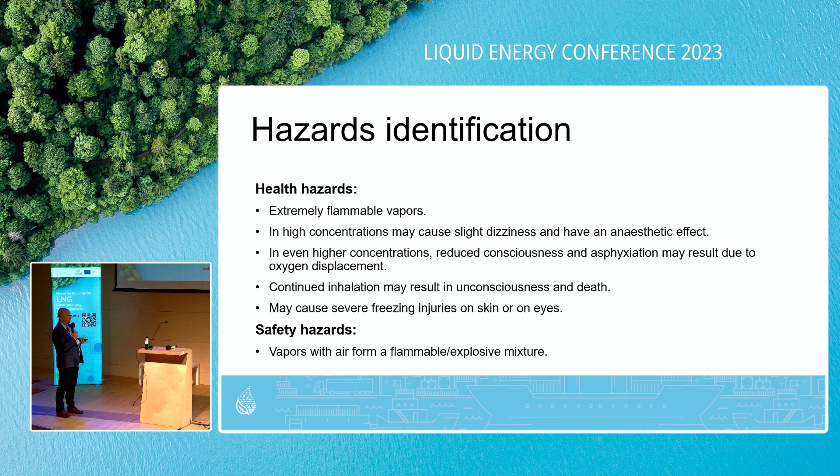And for the safety hazards, they are generally related to the flammable explosive mixture of the LNG. So what can we do to reduce these hazards? To reduce these hazards, we can use engineering controls. We can provide adequate ventilation to keep gas and vapor concentration below the flammability limits, generally less than 20% of the lower explosive level, so 20% of the 5%.

Yes, because the lower explosive level for the LNG is 5%, so it should be lower than 20% of 5%. In confined spaces, local and general ventilation should be provided. We should follow appropriate confined space entry procedures, use explosion-proof general ventilation and lighting in classified controlled areas, and be sure that explosion-proof flashlights and equipment are used.

So that was the engineering controls. Of course, we also have to use the PPE, so personal protective equipment, for eyes and face protection. The goggles or the face shields can be used.

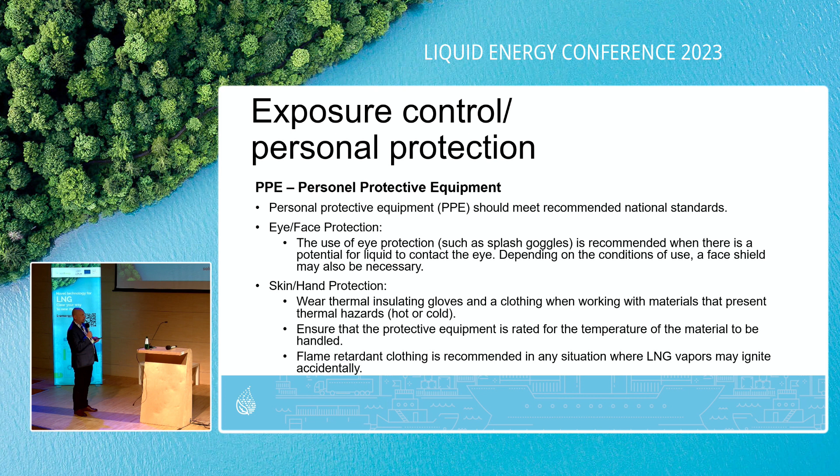For the skin and hand protection, the workers, the operators should wear thermal insulating gloves and clothing when working with materials that present a thermal hazard, hot or cold, in our case cold. We should ensure that the protective equipment is rated for the temperature of the material to be handled, and flame retardant clothing is recommended in any situation where LNG vapors may ignite accidentally.

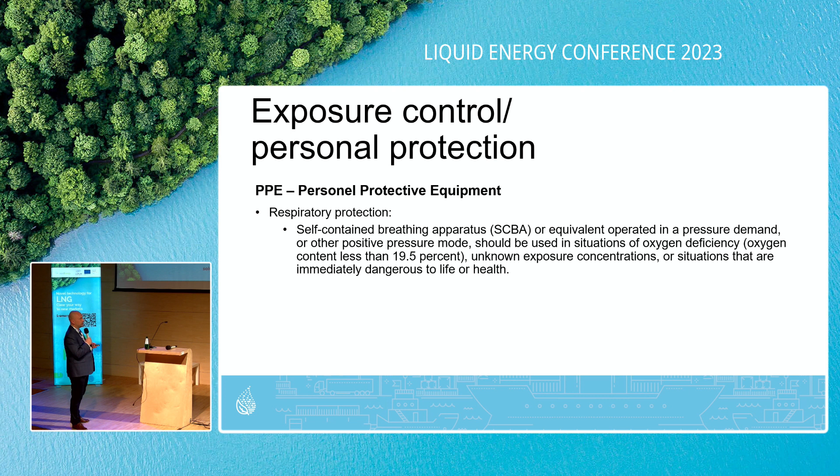For respiratory breathing protection, self-contained breathing apparatus or equivalent should be used when we know there is a low concentration of oxygen, or if the concentration is unknown, and in situations that are immediately dangerous for life or health.

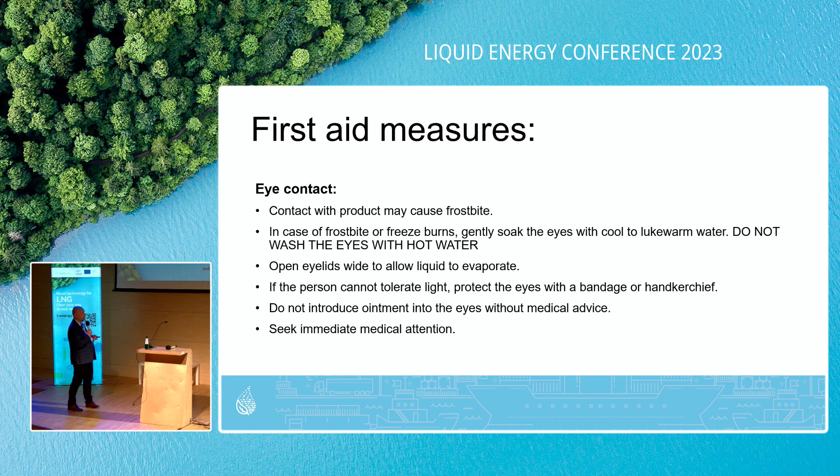If the accident happens and we have contact of the LNG with the eye, it can cause frostbite. In case of frostbite or freeze burns, we should gently soak the eye with cool to lukewarm water. We shouldn't wash the eyes with hot water, which is quite obvious. We should open the eyelids wide to allow the liquid to evaporate, assuming it is not a very high volume, like one drop of LNG or LBG. If the person cannot tolerate light, protect the eyes with a bandage or handkerchief. Do not introduce ointment into the eyes without medical advice, and we should seek medical attention.

If the contact is not with the eye but with the skin, of course it can also cause frostbite. In case of frostbite or freeze burns, we should remove the contaminated clothing and flush the affected area with cool to lukewarm water. We should not use hot water or dry heat. We should seek medical attention, and under no circumstances should the frozen part be rubbed, either before or after the warming.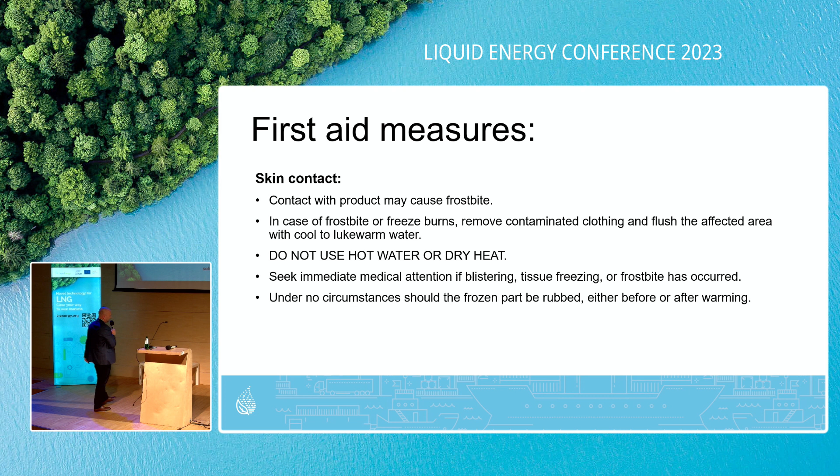Just to say a bit more - it's not the case that if we touch the LBG or LNG, we will have frostbite or frost injuries immediately. Generally, we can put a finger inside and take it away and nothing happens. So it's not very, very dangerous - injuries are not very probable. It is possible to put the finger in it and take it away.

So if we breathe the atmosphere, as my colleague said, the LBG or LNG isn't toxic. The problem is only that the level of oxygen is too low. So the problem is caused not by the LNG itself, but by the low level of oxygen, which is caused by the LBG. But LBG or LNG is not toxic.

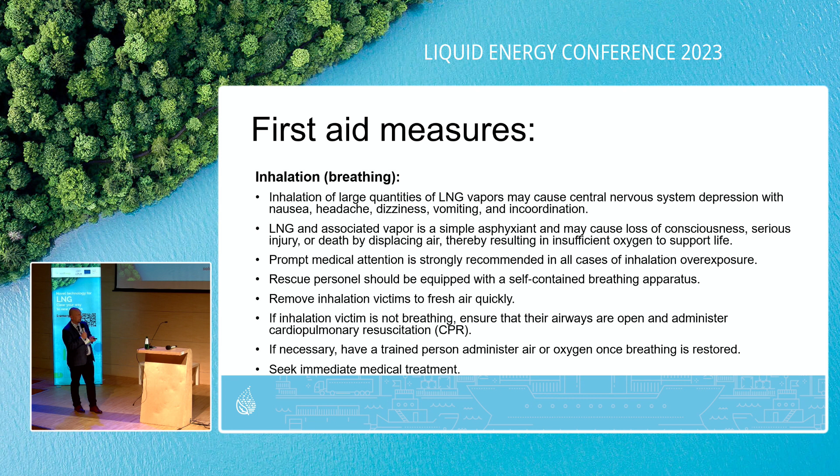Victims should be taken to fresh air quickly. If the inhalation victim is not breathing, we should ensure the airways are open and administer cardiopulmonary resuscitation, CPR. If necessary, a trained person should administer air or oxygen once breathing is restored, and of course we should seek medical treatment.

There is one more hazard, not very probable, but maybe someone will try - if we try to swallow the LNG, to drink it. Of course LNG is gas under atmospheric temperature and pressure conditions, and ingestion is unlikely, but if it happens, we should seek medical treatment as fast as possible.

The last part is the firefighting operation. In this case, we have a leakage or spill of the LNG or LBG, and we have a fire. To have a fire, three conditions must be secured. We should have the fuel - in this case LBG - and as my colleague presented, the range of flammability isn't very wide; it's rather narrow, between 5 and 15%.

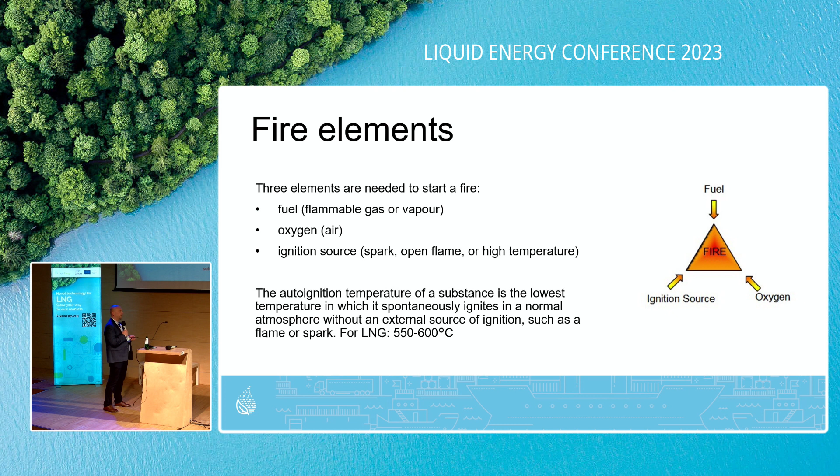We should have oxygen, and we should have an ignition source. The ignition source can be a spark, an open flame, or high temperature - the temperature of auto-ignition. Because of the different composition, it can be more or less between 550 and 600 degrees Celsius.

LBG itself is not flammable in the liquid state because of the flammable limits; it is not explosive and cannot ignite. To become flammable, it must vaporize and mix with the air, and the range of flammability is between 5 and 15%.

Mainly because of the different place of ignition, and the different pressures of the LBG, we can have different types of fires. If we have those three factors and we have the fire, we can have different fire scenarios.

The first is the vapor cloud flash fire. This will occur if we have late ignition, so ignition will be at a distance from the leakage. The concentration of methane in the vapor cloud should be between 5 and 15%, but at some distance from the leakage.

In this case, not all the cloud will fire immediately at once. The fire can burn forward to the cloud front or backward to the release point, to the spillage. The speed of propagation, the speed of the fire, is not very high - more or less 10 to 20 meters per second.

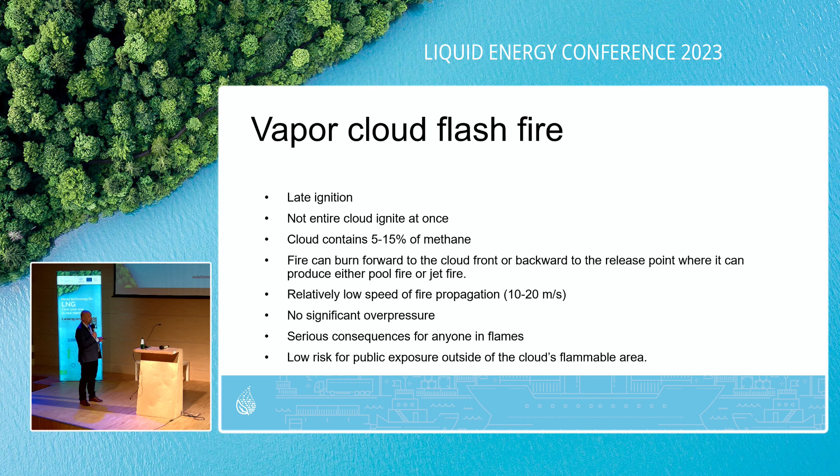If the leakage is under pressure, we can have the jet fire. The jet fire occurs if the ignition of the liquid or vapor of a two-phase mixture is under pressure condition. This is unlikely for the LNG storage tank, because normally it is stored at atmospheric pressure, so there are no high pressures. But for tanks transporting LBG, it is possible to have higher pressure, so we can have the jet fire.

It may be caused by vapor leaking from high pressure sources, for example pumps, vents, risers, or piping. It can be the reason for severe damages, but limited and confined to the local area.

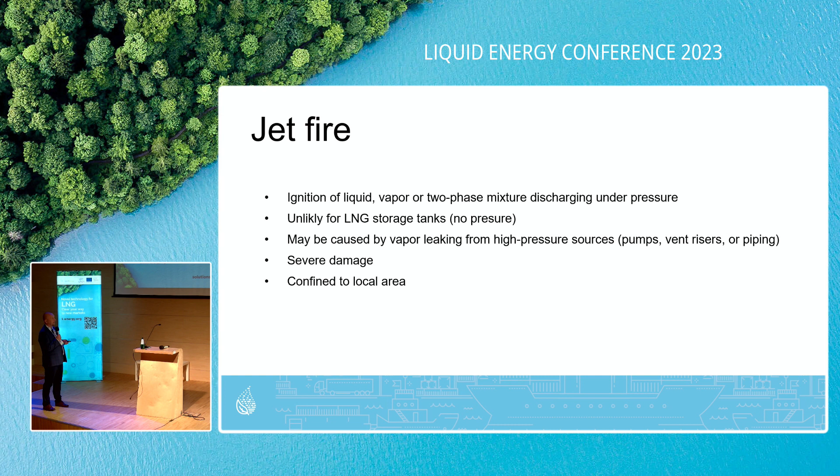Then we have the pool fire. The pool fire is a fire close to the leakage area. Where you have the pool, you have the vapors, and the vapors burn close to this pool, just above the pool.

Because of the leakage, the cloud can move together with wind, so the fire will also tilt in the wind and wrap around obstacles, such as the front of the dike. In a diked area, fire will remain contained inside. Outside the confined area, fire is free to flow based on the topography, the shape of the area.

For spills on the sea, the pool will spread to a steady pool size, and after ignition, it will shrink.

So, to conclude, if we have the spillage and ignition at a distance, we will have the vapor cloud fire, which can move to the place of the spillage or to the front of the cloud. We can have the jet fire in case we have higher pressure. We have the pool fire above the spillage. And of course, the vapor cloud fire can end with the pool fire or the jet fire, so it can transform from one type of fire to the other.

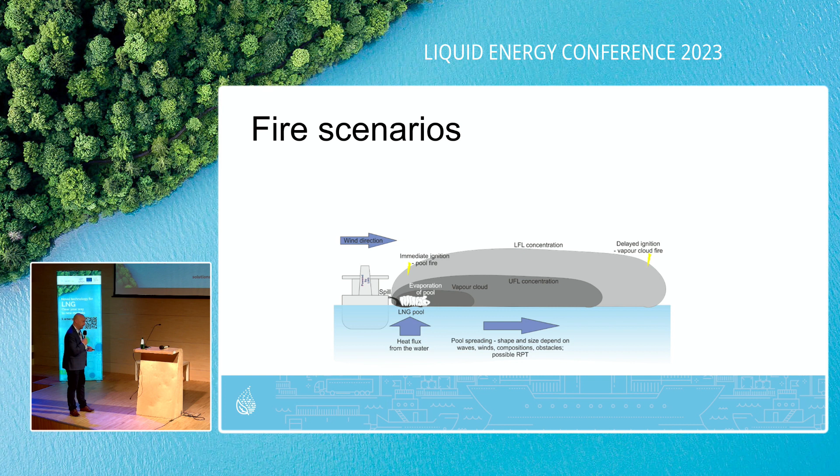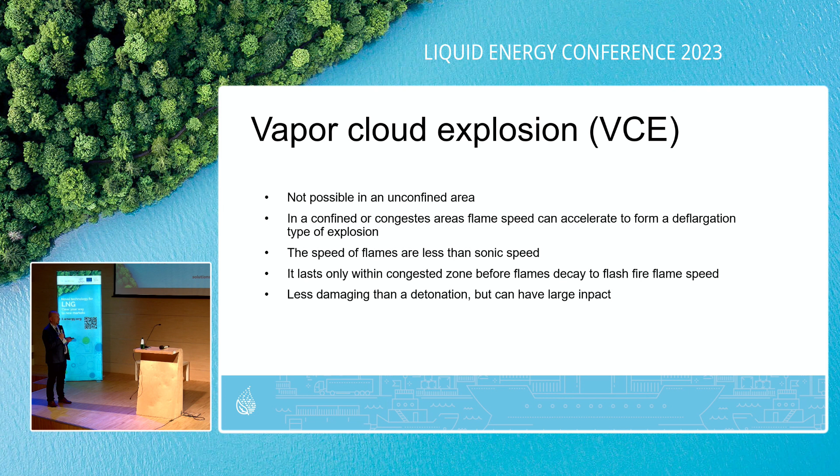So it is just an explosion for a short time. It is less damaging than the detonation because of the lower speed, but it can have a large impact, only in closed areas.

Then we can have the BLEVE. The BLEVE was partly explained by Stefan, and as he said, it is possible for pressurized flammable liquids exposed to an external fire, when the unwetted metal over the vapor space in a container becomes weakened and fails, releasing the liquid that partially flashes to vapor. The flashing vapor expands and ignites as a boiling liquid expanding vapor explosion, so it is called BLEVE.

LNG is not pressurized normally, so there is a very low possibility of BLEVE, but as I said, LBG can be transported in cars, in tanks, at higher pressure, so it is possible for that.

The last part, which I want to present because of the shortage of time, is a firefighting plan. This plan should be prepared in advance, and well prepared. What does well prepared mean? The general information is that the firefighting plan should avoid the tactics of hit and run.

In most cases, the best way to behave in the case of fire is to let it burn, if the situation is under control and there's no danger to the environment or to people close to the fire. The LNG will burn and nothing more will happen. Of course, we can try to cool down the surroundings using water and leave the fire to burn itself.

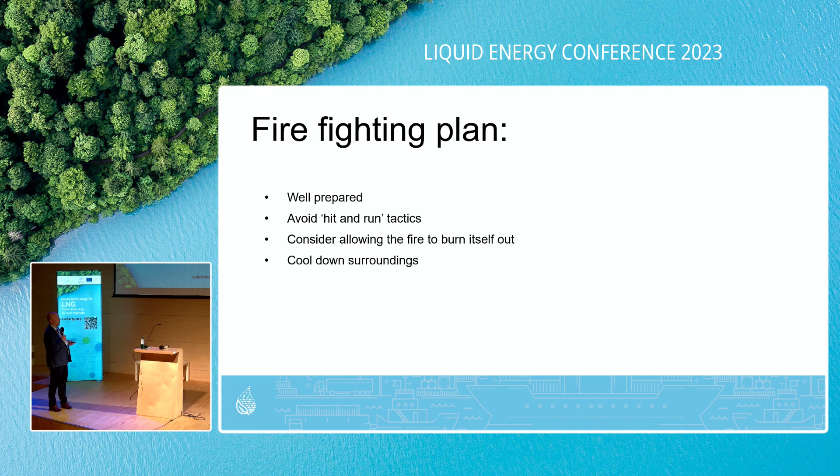If it is not possible to leave the fire to burn down, we can use dry powder, which is the best method for trying to stop the fire. If possible, we can use a fixed installation, but normally there will be portable extinguishers.

If you want to use the dry powder, we should use all possible dispensers at once. Do not try a little bit, then maybe a little bit more, because that is not a good way of firefighting. We should use all dispensers at once.

The dry powder causes the flame to go out almost at once, but we have to remember there is no cooling effect. We should avoid putting direct pressure of the powder jets on the surface of the LNG, because if we do it, we'll increase the rate of vaporization, making it harder to extinguish the fire.

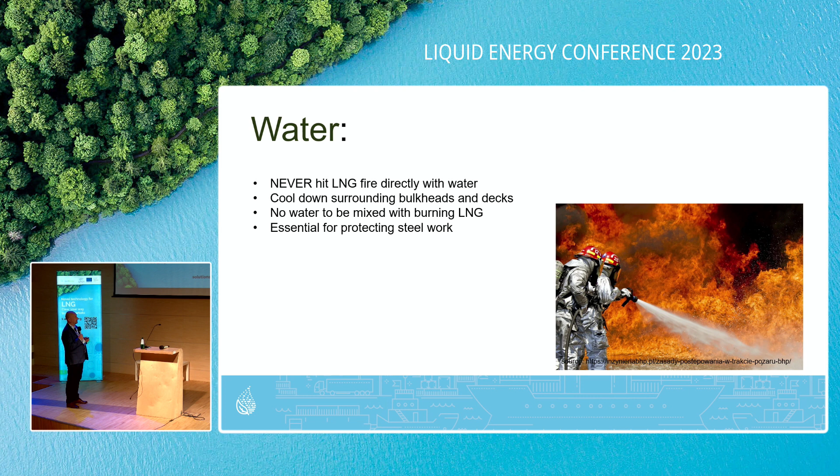Water is generally used for cooling down surroundings and is essential for protecting steelwork. We can also use CO2, which will stop the fire because of the depletion of oxygen, but this is only possible for confined, closed areas, such as cargo compressor rooms, electric rooms, and inert gas dryer rooms.

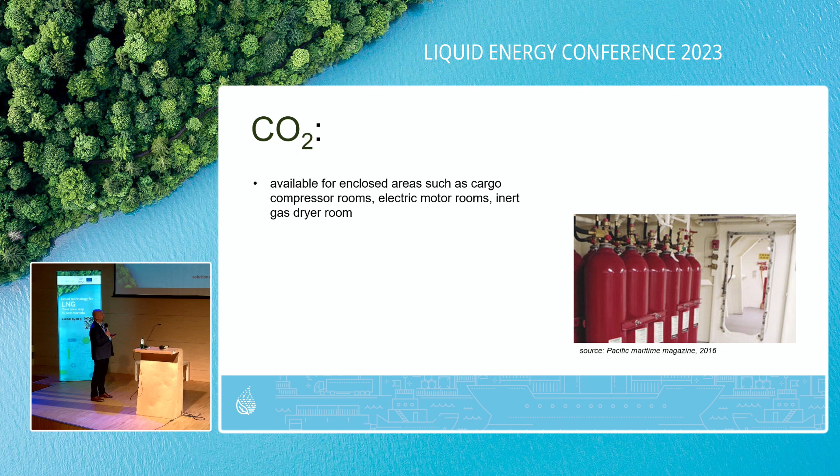Some general rules, some general procedures for the firefighting operation. First, we should isolate the source of the leak. If possible, stop loading, discharging, and shut down all manifold valves. Sound the alarm, and then provide protection for equipment and for the firefighters.

As presented, attack fire with the maximum rate of application of dry powder. Do not agitate the surface of any pool of LNG. Remain on guard against possible reignition, since ignition is possible at the auto-ignition temperature.

Even if we stop the fire, there are still some hot elements. So there is no fire, we stop the action, but if the mixture is between 5 and 15%, and we have the ignition source and the oxygen, the fire can start again.

All remedial measures must be situational, so there is no single best way to execute the firefighting operation. First, the firefighter should stop at a safe distance, minimum 100 meters from the accident site. Check the situation, the size and location of the gas leak, non-ignited liquids, fire in the gas phase or liquid phase, and check the wind direction, attacking with the wind from behind.

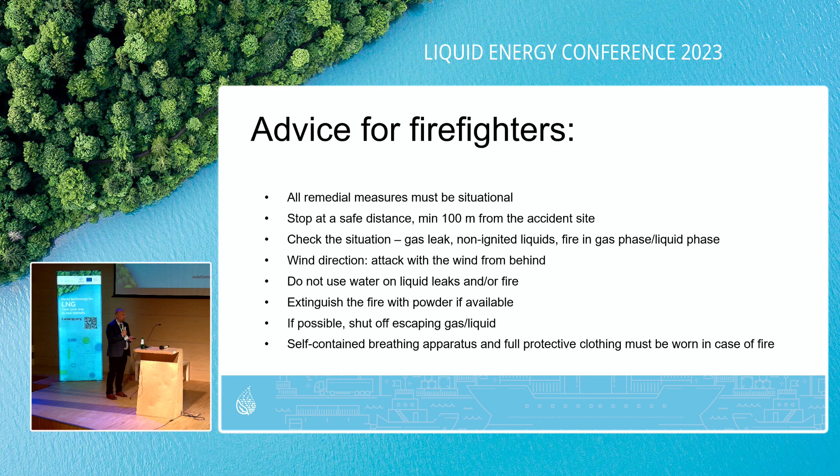Do not use water on liquid leaks and fire. Extinguish the fire with powder if it is available. If possible, shut off the escaping gas or liquid, and use self-contained breathing apparatus and full protective clothing in case of an LNG fire.

And that was the last point of my presentation. Thank you very much, I'm almost at time.